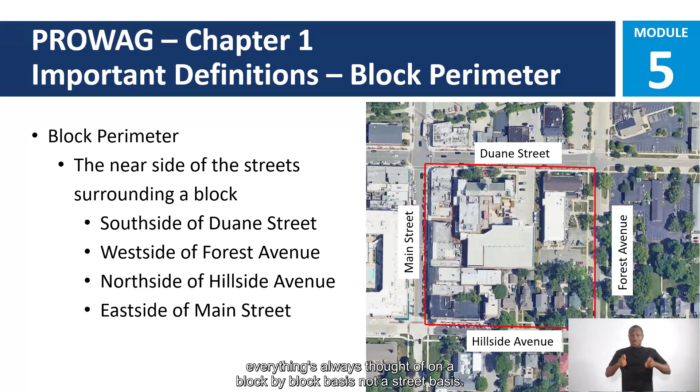Required spaces, we already talked about this a little bit, where on-street parking is provided. If anybody ever wants to have a conversation on what in the ADA requires on-street parking spaces, the answer is this: Fortyune versus the City of Lomita. So just threw that out there as sort of a, if you're ever interested in diving into the legal side of this, Fortyune versus the City of Lomita is really sort of where a lot of these accessible parking, not the technical requirements, but the obligation to provide them really sort of started with this legal case. I know sometimes people are really interested in the legal cases and how we got here. Other times they're not. This is kind of an interesting one because it did go all the way through the system and is sort of the precedent that is used a lot of times for parking conversations.

Parking wise, if you're ever doing on-street parking, PROWAG does have its own accessible parking table. Very similar to the 2010 ADA standards, not exactly the same. So if you're ever doing on-street parking, make sure that you're looking at the parking table that is provided within the PROWAG. 1 to 25 spaces, 1 spot, 26 to 50, 2 spots. I'm not really sure how you get to 201 parking spaces on a block, but if you do, at that point, it becomes 4% of the total.

The important thing to remember with on-street parking is you have to provide that connection back to the sidewalk. That's really what we're trying to do with on-street parking. A lot of this is about placement of those on-street parking spaces. Are they placed in such a way that we are providing that accessible route to get to our sidewalk? So for parallel parking spaces, the curb ramp can be provided at either end of the parking space. There's a slide about this later on, but if that's the parking spot that's closest to the curb ramp, your intersection curb ramp can serve as your curb ramp for the parking space.

So accessible parking spaces doesn't automatically mean that you need to provide more curb ramps within your block. If based on where you place them, you can utilize the curb ramps that already exist for the crosswalks as the arrival point for the parking spaces as well. For perpendicular or angled parking, the curb ramp provided connects the access aisle to the pedestrian access route. So if you are going to provide a curb ramp within your perpendicular or angled parking, that goes in the access aisle for the parking spots.

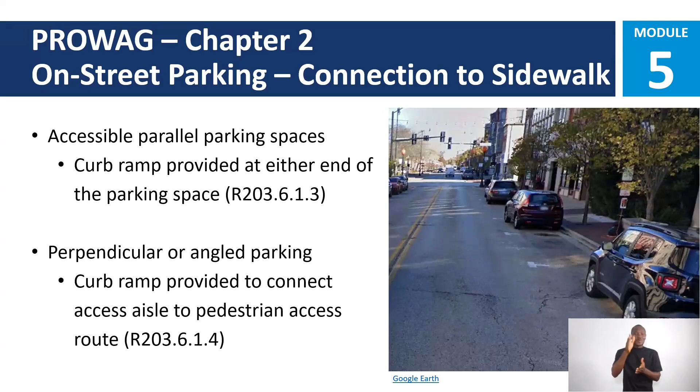Parallel parking spaces. So these numbers are going to seem shocking. This is all about the exemption. So don't be stunned by the numbers. The way that PROWAG reads is that parallel parking spaces shall be 24-foot long, 13-foot wide, which sounds outrageous, right? So this is where we go to the exemption. Where parallel parking spaces are altered, but the adjacent sidewalk is not, the spaces can match the dimensions of the adjacent spaces, if provided nearest the crosswalk and a curb ramp is provided. So if all your other spaces are 8 foot wide, that space can be 8 foot wide.

Also, in alterations, where providing the dimensions shown above would result in an available right-of-way less than or equal to 9 feet measured from the curb line to the right-of-way line, you could also go back to matching the existing spaces. So from a math perspective, the way to think about this is if you have less than a 14-foot wide sidewalk, you can provide the 8-foot wide parking space. If you have, say, a 20-foot wide sidewalk, they want you to provide that 5-foot cut in for the accessible parking space. So unless you have a super wide sidewalk, you're basically going to use these exemptions to not have to provide the 13-foot wide parking spot.

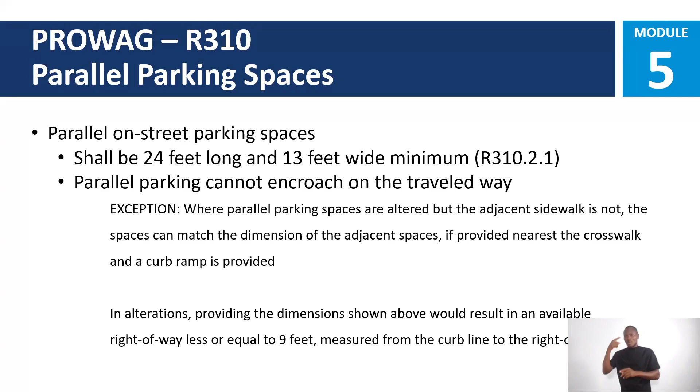So picture here, for those of you in the back, this is what I would call a standard downtown area, marked parallel parking on both sides of the street. Without getting into the questions of complete reconstruction or key locations, does anybody have any opinions on where they would start looking at placing these accessible parking spots? Near the intersections. That's my advice to you for the easiest way to do this. Always start near the intersections. If it works, it's the best possible place to put them.

So in this case, we got 2 spots on the top, 2 spots on the bottom. I am not saying that you have to make both those spots accessible parking. To me, those are the 2 spots to start. I would also add, if you're flat on one side and it's like a 9% road grade on the other side, be thoughtful as to where you put those spaces. Place them in the flattest possible location. Again, think about the usability, think about the end user, and think about how this is going to be used.

So parallel parking spaces, at the end of the day, they're fairly straightforward. If you got less than 14-foot wide sidewalk, they can be that 8-foot wide. They can go at the ends. You can use the curb ramps. The 50%, even though you're using the curb ramp as your access point, that 50% clear center requirement still exists for this, because that's serving 2 completely different groups of people.

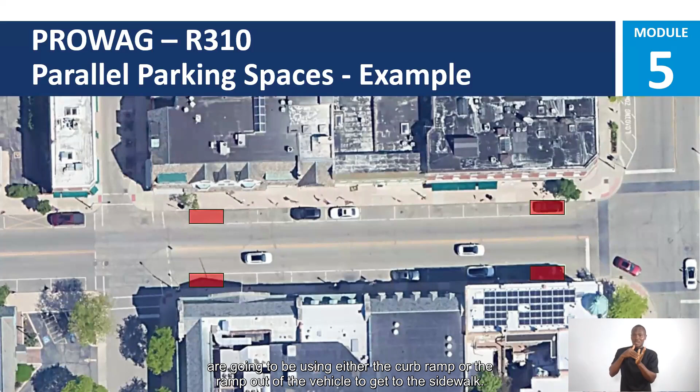The curb ramp is about someone who drives and uses a mobility device to get up to the sidewalk. The 50% sidewalk clear zone is about the person who exits their mobility device on the passenger side. So providing one does not exempt you from providing the other, because those are 2 very distinct users who are going to be using either the curb ramp or the ramp out of the vehicle to get to the sidewalk. So we already talked about the 50%. Parking space shall be identified by signage. If you have an accessible parking space, you have to sign it as an accessible parking space.

Also, if you just read R310, it says that the sign has to be mounted 60-inch minimum above the ground surface. If you have sidewalk directly behind the back of curb, that number goes up because basically it has to get over that 80 inches for hitting your head on it. So even though it says 60-inch minimum here, the PROWAG is full of situations in which 60-inch minimum applies to the parking spot, but there might be other standards within here that require you to change that more.

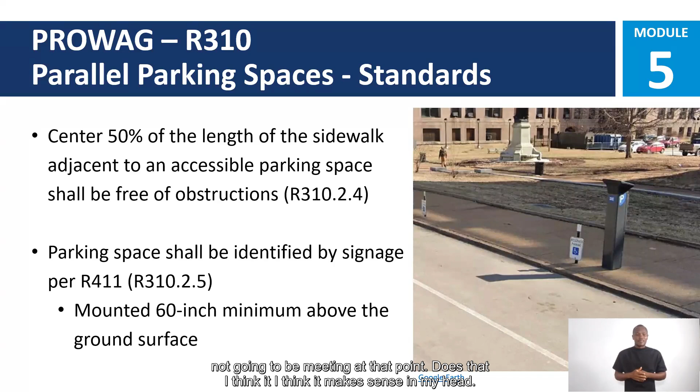We'll have a deeper conversation about this whenever we get into signage, but just a friendly reminder, a lot of times whenever you read these, if you just stop at R310 and you put that sign in at 60 inches within the existing sidewalk, there's another part of the guidelines that you're not going to be meeting at that point. I think it makes sense in my head. I don't guarantee it makes sense in anybody else's head.

Angled parking. The width of the angled parking shall be 132 inches with a 60-inch access aisle in this case. So the perpendicular parking was the 8-foot parking spot, 8-foot access aisle right next to it. For angled parking, they want the 13-foot parking spot. Is my math right on that? No, 11-foot? 11-foot parking spot with the 5-foot access aisle next to it. So angled parking and perpendicular accessible parking do not have the same width requirements as each other.

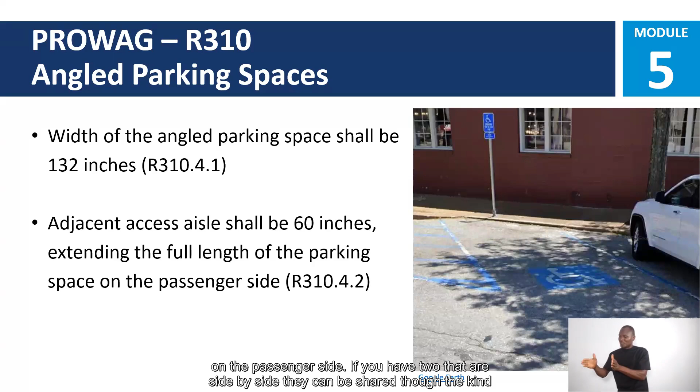So again, access aisles are still on that passenger side. So angled perpendicular parking, access aisle always goes on the passenger side. If you have two that are side by side, they can be shared. If you have two that are side by side, though, it is fair to ask that question of, are you providing coverage throughout the block if you need two accessible parking spaces? Is it best to put them right by each other, or are you better off to space them out across the entirety of the block?

But if for your design, the best answer is to have two accessible spaces right by each other, they can still share that access aisle. This is specifically for those examples of typically on-street parking tends to be one accessible space, and then the other accessible space is located somewhere else on the block.

So passenger loading zone. Oh. Let me read. I believe there's a specific exception about it. Let me read up on that, because I feel like there's something. Write that down, Nick. I'll figure out exactly where it's at. I'm almost positive there's something in there. Let me do a bit of homework. For better or for worse, my general ADA answer is give me a minute.

I will also throw out, if you don't know the answer to a question, you are never wrong to say, give me a minute. If anybody ever asks you an accessibility question, whether it's out in the field, in the office, a council person, it's never wrong to say, I need to look that up. Because my second answer is always, well, here's the 11 different circumstances that can control what's accessible and what's not accessible. So I say it a lot. I encourage you guys to say it a lot. Take that time to look into all the options so you can provide one good, clear answer at the end.

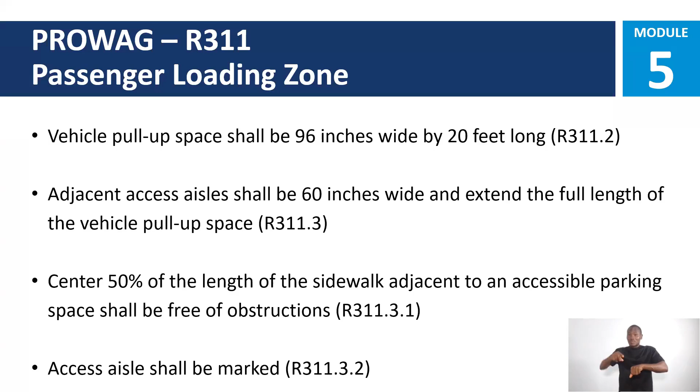So next up, we are going to jump back to R304 and dive into the always exciting world of curb ramps. Getting into curb ramps now. And so we're going to start off with some definitions of what is a curb ramp. So a curb ramp, in a general sense, is a ramp that will take you from the street or crosswalk to a pedestrian access route. So to break it down further, it's a sloped connection that's cut through or built into a curb, up to a curb. Curb ramp being perpendicular or parallel to the street or curb that it serves, or combination thereof.

So again, it's to take you from the street to your pedestrian access route, your accessible route that's in your pedestrian right of way. Then a crosswalk, that's the street part of your curb ramp, which is they both tie together, are part of a roadway that is located at the intersection or connections of pedestrian circulation paths. So a crosswalk is going to take you from pedestrian circulation path to pedestrian circulation path. That pedestrian circulation path has the curb ramp in it that connects you to the pedestrian access route, giving a lot of terms and a lot of definitions all combined within each other. But again, it's crosswalk to ramp to landing to pedestrian access route. Those all flow in together into one.

Where we get confused is a curb ramp is not a ramp. So what is a ramp? A ramp is a change of grade within your pedestrian access route, pedestrian circulation path, that is greater than 5%. It doesn't have to be part of the circulation path that follows the road grade, but any deviation of greater than 5% that is needed to get access to the pedestrian access route is now considered a ramp. Confused you yet? It confused me too.

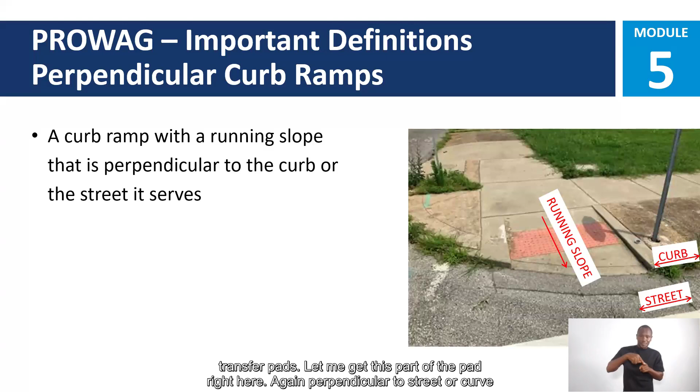That's how you define what a perpendicular ramp would be, as compared to a parallel ramp, where it comes down onto a landing and it follows your curb or street line. You'll see this around large radius returns for streets that come into an island, for large highway crossings or anything like that. So the curb ramp with a running slope that's parallel to the curb or the street. You see that it comes down, there's two running slopes that you're gonna have involved with a parallel ramp, with a landing in the center of those that match up to the road grade.

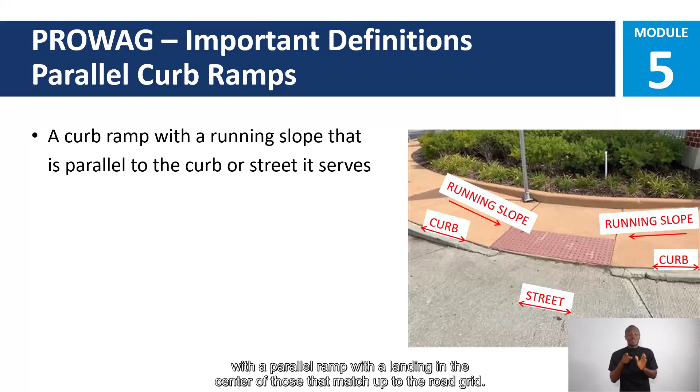That's a way for anyone with a visual impairment to determine where they are going, and when they feel the roller or cane go over the top of that area, it's easy for them to determine if they're running over paint and then they hit just raw asphalt or concrete. They can feel that difference, so it gives them sort of a boundary of where they're supposed to go. So when you go back and you redo curb ramps in general, you need to know that you're going to come back and redo pavement markings as well as the crosswalk itself to get from curb ramp to curb ramp.

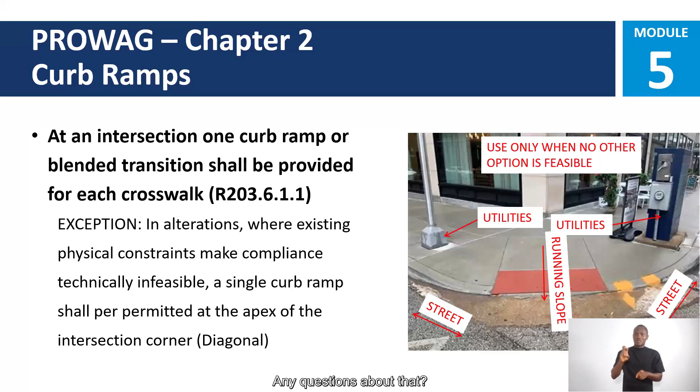But when a pedestrian crossing is prohibited, a curb ramp or blended transition shall not be provided on the roadway. With that exception though, what they do require is a landscape or non-paved surface, 24 inches minimum, or a detectable edge treatment at the bottom of 15 inches. So what this is stating is that you're going to have a hard curb, and you're also going to have these barriers at a minimum of 24 inches.

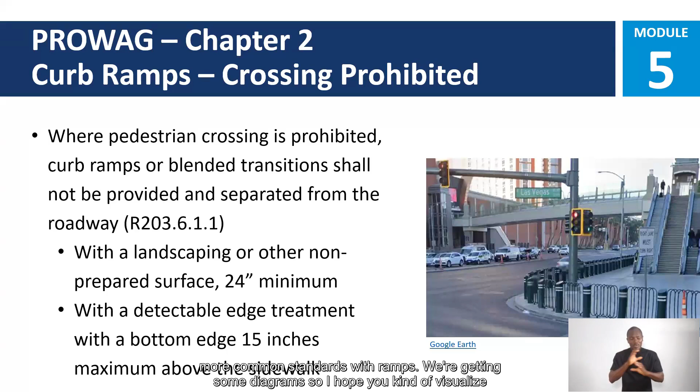Okay, so we're going on to more common standards with ramps. We've got some diagrams to help you visualize what we mean by this. So when we talk about ramps, there's clear width, or the utilized space within the curb ramp. The clear width within curb ramp runs, excluding any of the flares outside the walking area, is to be a minimum of 48 inches. Notice that is the same minimum as your sidewalks. If your sidewalk is going to be 5 foot or 6 foot, your clear width for your ramp, the usable space in that ramp, is going to be the 5 foot or the 6 foot you've designated your walking space to be.

So curb ramps shall be entirely within the crosswalk, as I mentioned earlier. So when you go back and redo a curb ramp and you add 2 perpendicular ramps where an existing parallel was, you're going to need to redo the crosswalk itself as well. That's something to keep in mind for any project for your cost estimates, that the pavement markings are included as well. But again, if you have 5 foot sidewalk, you have a 5 foot wide ramp. You have a 6 foot wide sidewalk, you have a 6 foot wide ramp. If you go to the minimum of 4 foot, that'll get you through clear space. Any questions on that?

Okay. Going on, further definitions. This is going to be repeated; I have some visuals afterwards, but for the majority of ramps, these are all going to stay standard. Run slope at a maximum is 1 to 12, or 8.3%. That is what you're utilizing to go down your ramp to the grade of the road from your pedestrian access route. You don't run sideways, you run forward, that's your run slope. It's an easy way to remember it. Your cross slope is always going to be 1 to 48, 2.1% as your maximum. As a design suggestion, it's easy to design to 1.5.

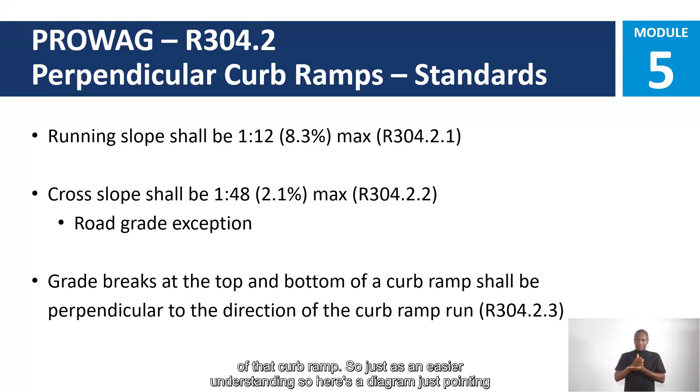Grade breaks are at the tops and the bottoms of curb ramps, and they shall be perpendicular to the direction of that curb ramp. So just for an easier understanding, here's a diagram. This is pointing out our grade breaks at the top and the bottom of a perpendicular curb ramp. You see our road grade is coming down left to right, so our cross slope is going to follow as such at a 2.1 max.

And again, if you need to jot these down or draw these again, these will all be online again, so you don't need to be artistic. But the running slope is at a maximum of 8.3. So again, going from your grade break from the top of the ramp to the bottom of the ramp, you have a maximum 8.3, maximum cross slope 2.1.

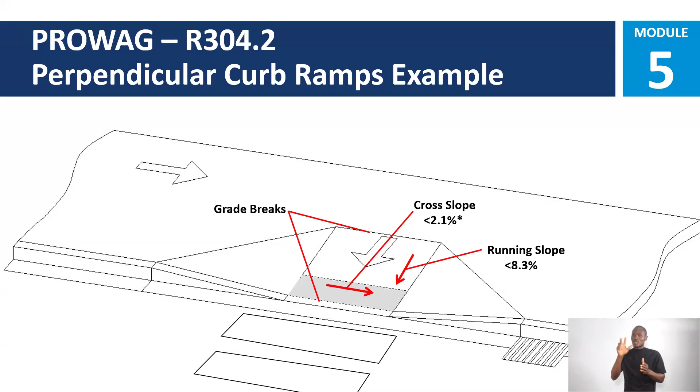Your clear width areas, again, this is going to be your landing area that we were talking about earlier, 48 by 48 inches or 4 foot by 4 foot at a minimum. It should be provided at the bottom of the grade break and the top of the grade break next to the crosswalk. This is a lot different than what we have with a parallel ramp because you're going to have 2 clear space areas.

So those all have an extent of clear width area of maximum 5% when you match the road grades. So when you come down onto the street grade, you have a maximum of 5% to deal with. So you're gonna have to do some redesign of that shelf of the road. But when you do any kind of change of grade on your road slope, this is what can activate you changing a ramp slope as well.

So for a better visual, you can see the top where we had grade breaks. Now we have a 48 by 48 minimum landing at the top, and we have a 48 by 48 clear space at the bottom as well, next to the crosswalk. And I think beforehand, I forgot to mention flare slopes. Flare slopes are a maximum of 10%.

When you measure your flare slope though, don't go and put your 2 foot level onto the curb. The curb is not what you're measuring for the flare. This is where you can get in trouble: if you're floating concrete and you shove a little too hard, that flare can start getting punched up and then you're flying into 15%. This is why it's hard for some individuals when you're out there

So, it depends on, number one, the scope of work and what you're doing. And number two, if this is at a stop controlled intersection, then the requirement is a 2% cross slope. If it's at a yield controlled intersection, then that's where we get up to the 5%. And it's really sort of what you're doing with the road. If it's a roadway reconstruction project and you have a stop sign there, then you need to reconstruct that back at 2%.

If, say, you're just putting in new sidewalk as part of a sidewalk project, then most likely your scope of work is not going to take you out into the road. But if you ever touch the road, then you'll need to bring that up to code, to meet the guidelines at that point. So it's kind of based on what else is going on with the project. Actually, we were working on a project where we were just doing sidewalk.

And there was no way to get it into compliance because the road grade was, I think, 5.5%. So there's no way to match going into the road where it stops. So in that case, I would say you're going back at the road. Well, if you ever reconstruct the roadway, at that point, what worked for this project probably isn't going to work for the next time you do this.

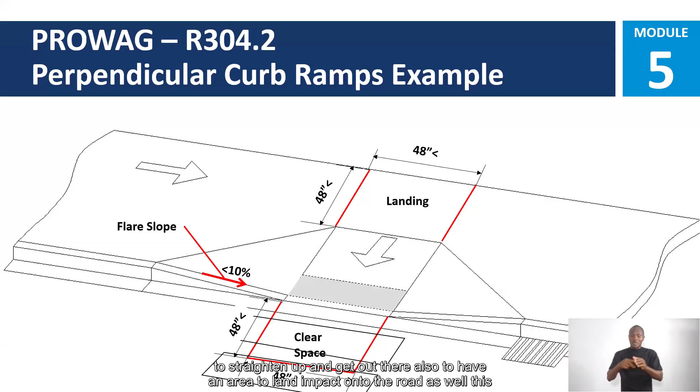Also, just to give an example of this clear space, because I'm going into parallels and you'll see there's not going to be a need for the clear space area. When you're entering the street or coming from the street onto your ramp, you need an area to square up and prepare yourself, as someone in the chair, to go up that ramp. That's the idea behind a clear space: an area to straighten up, and also to land onto the road. This will be different for a parallel. So to reiterate, parallel ramps have the same running slope, 8.3% maximum, 1 to 12, cross slope 1 to 48, 2.1%, except for the road grade exception we discussed earlier.

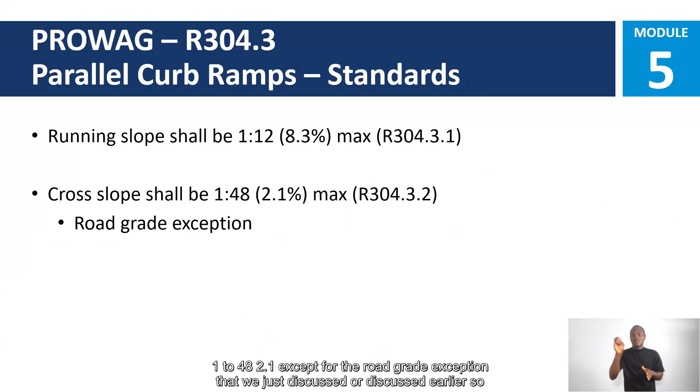So we're going into parallel ramps. You can see we have 2 running slopes that match down into a cross slope area that falls to road grade. That is our landing area, which is why you don't need 2 separate clear spaces for a parallel ramp. Parallel ramps come from large radius returns with one adjacent sidewalk coming through. You can drop down to road grade and follow a matched road grade, so you don't need an area to prepare yourself because you're in the safety of the sidewalk or pedestrian access route to access either running slope. The grade breaks again are the top and bottom of the curb ramps, and they should be perpendicular to the direction of the curb ramp.

This is your landing area with your grade breaks. This is what we're talking about. You have running slopes coming down to that landing area. So there's no clear width area outside in that road. For anyone in the back, they can see all these grades.

And this is going to be a minimum of 48 inches or 4 foot by 4 foot. Again, this still stands true if you have a 5 foot sidewalk. It's going to be 5 foot by 5 foot; 6 foot sidewalk, 6 foot by 6 foot. That's going to give yourself that landing area on a parallel ramp.

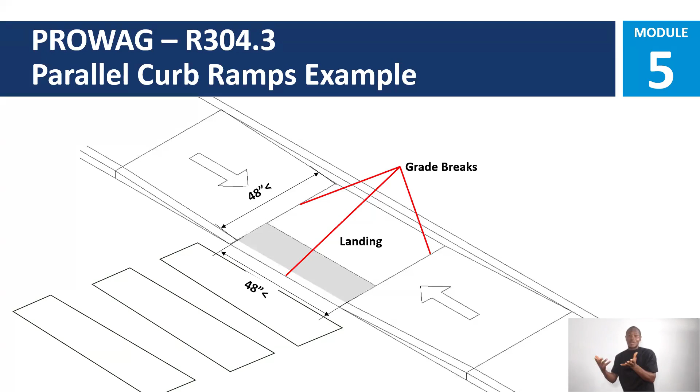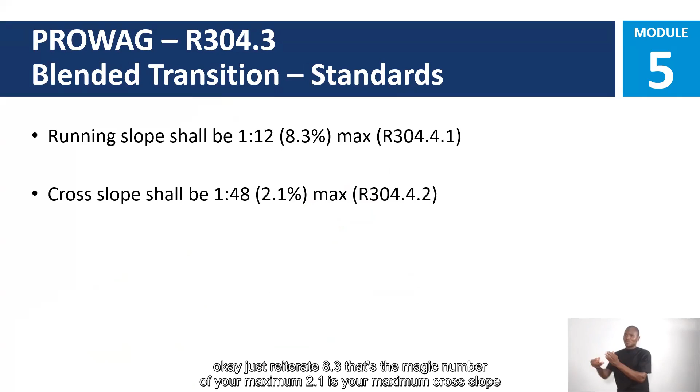So you're gonna have a maximum run slope on either side of 8.3. Again, don't try to build to the absolute maximum. That's where you're gonna get yourself in trouble. Don't design to the absolute minimum, same way. You have a cross slope of 2.1 falling off onto road grade for visuals.

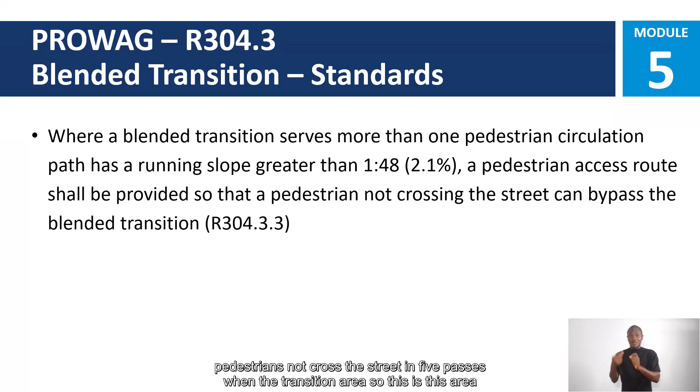So where a blended transition serves more than one pedestrian circulation path, so you have 2 sets of sidewalks adjoining at the same time, and the run slope is greater than 1 to 48 or 2.1, a pedestrian access route shall be provided so that pedestrians not crossing the street can bypass this blended transition area. So this is this area that we're talking about in the landing. This landing area is a clear width area. So having the minimum 4 foot area inside that landing needs to be an area.

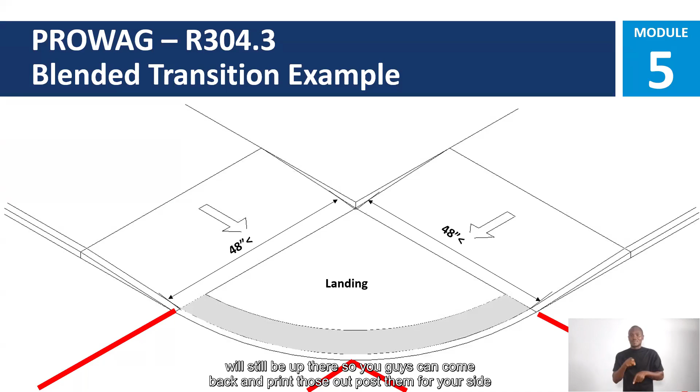So everyone following with that? Okay, and again, these diagrams will all be downloadable, and all those numbers will still be up there. So you guys can come back and print those out, post them for your side, whatever is going to help for you.

Now we're going to get into the fun talks of detectable warning surfaces. Travis. So, yeah.

I think a couple of housekeeping items on the question related to the crosswalks. R302.5.2.3 is what specifically talks about crosswalks with traffic control signal. And that sets that at that 5% maximum slope. So yeah, that 5% maximum slope is established there.

Detectable warning panels. Detectable warning surfaces have been controversial in the disability community since they were first thought up. They are loved by the blind community. They are despised by the wheelchair community. And if you ever go to a disability ADA symposium, something like that, if you hear an argument between two different disability groups, there's a chance it's over detectable warning surfaces.

They have changed a lot throughout the years, but this has sort of been the standard for the last 20, 25 years, as the compromise that was sort of established through these various communities. And really what a detectable warning surface is, it is a standardized surface feature built in or applied to pedestrian circulation paths or other pedestrian facilities to warn of hazards.

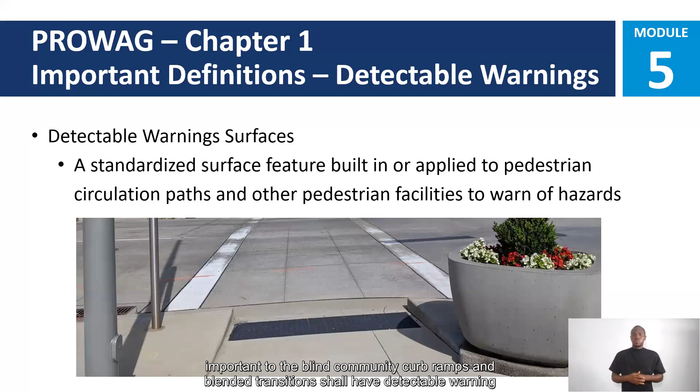So there are places they have to go. There are clear requirements where they go, but don't just put them everywhere. Give some thought as to where they go, or else they're really going to stop their usefulness to the blind community. And these are really, really important to the blind community. Curb ramps and blended transitions shall have detectable warning surfaces. Sort of clear cut. I think we're all generally familiar with this requirement. Exception, detectable warning surfaces are not required on curb ramps used exclusively to connect parking spaces and loading zones, the comment from before.

So then the big question becomes, what happens at driveways? And as we already talked about, pedestrian circulation paths at driveways controlled by yield or stop control devices or traffic signals, that's been taken from should to shall have detectable warning surfaces. For other entrances, engineering judgment is always allowed if you deem that there is value in having it there. But the shall applies to yield, stop controlled, signalized commercial entrances.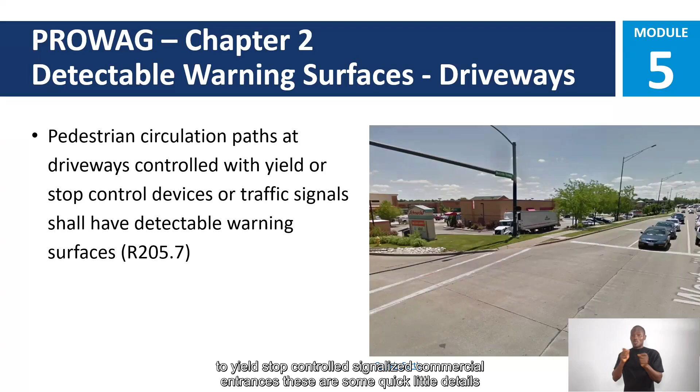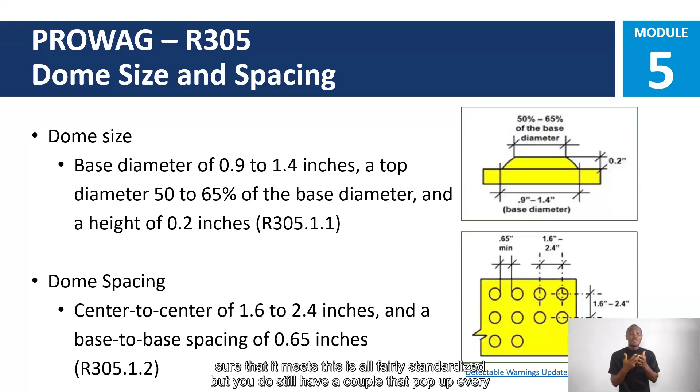These are some quick little details on what they have to look like. For the most part, the detectable warning panel manufacturers have gotten very good at meeting these requirements. I bring these up solely to state if you as a community want to say, these are the only detectable warning surfaces that are allowed in my community, take the minute to make sure that they meet the requirements. Because by you stating that these are the ones that are allowed in our community, you've now taken the responsibility off somebody else and put it onto yourself. So take the couple minutes, look through the requirements, make sure that it meets. This is all fairly standardized, but you do still have a couple that pop up every once in a while that aren't within these parameters.

This comes up as well. Contrast, the way that the guidelines read is that the detectable warning panels have to provide contrast with adjacent walking surfaces, either light on dark or dark on light. They don't provide, or none that I've ever seen has provided, a scientific definition of what the word contrast is. I've never seen a clear, it's got to be X amount of whatever for it to contrast. So this is in a historic district, and they have brick sidewalks, and they put in detectable warning panels that look very similar to the brick sidewalks. So in this case, I would argue that there's no contrast there.

However, when this argument happened, the response was, okay, tell me what we need. And that's sort of where we ran a little bit short, is knowing what the clear definition of contrast is. But just know that there's a reason detectable warning surfaces are bright yellow, bright red. The goal is for them to be very, very visual. Because we're not just talking about the blind community here, we're also talking about the low vision community. So with the low vision community, yes, there is the ability to see, but we want these to stand out. I understand there might be a desire to have them blend in with the sidewalk because it is more pleasing to an architect or landscape architect or whoever. But the goal here is for these to stand out, for these to matter.

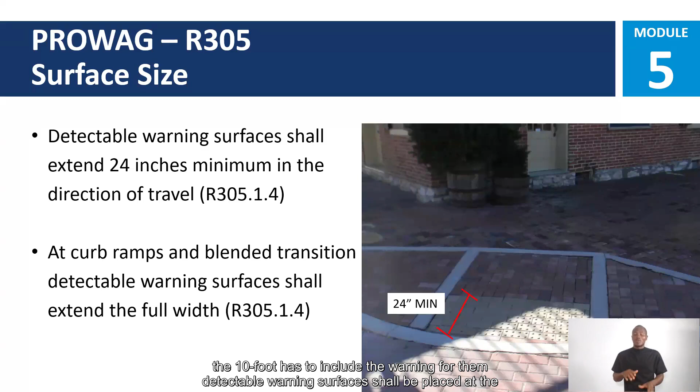Detectable warning surfaces shall be placed at the back edge of curb or no greater than 6 inches from the edge of pavement. So you can't set them 2 foot off the back of curb because, for whatever reason, that feels better. The goal is to have them right on that curb line, because really what we're trying to do is shorten the distance that they have to travel between detectable warning surface and detectable warning surface.

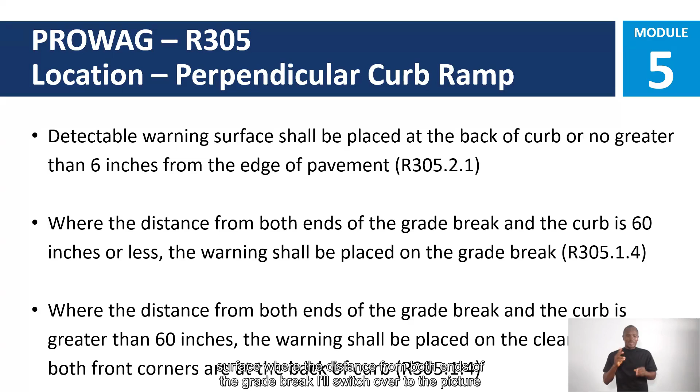Where the distance from both ends of the grade break, I'll just switch over to the picture. Where the distance from both ends of the grade break is less than 5 foot, it's put perpendicular to the curb ramp. Where it's greater than 5 foot, that's whenever we wrap along the curb line. So 5 foot's kind of the magic number there.

Of less than 5 foot, you're going to have a little bit of concrete on the far side between the detectable warning surface and the curb line. Once you get greater than 5 foot, that's whenever we're wrapping it along the curb line. That is consistent with IDOT standards as well. So 5 foot's sort of your magic number there. Any questions? Oh, yes.

I consider it a landing because IDOT considers it a landing. I have had many discussions with the US Access Board, and their feelings are a little bit different than IDOT's are on that. But for the most part, most of what I'm involved in is work where we have to meet IDOT standards, and the IDOT standards do consider that a landing. If you're working on a purely local project, PROWAG does not have those strong feelings about that being a landing.

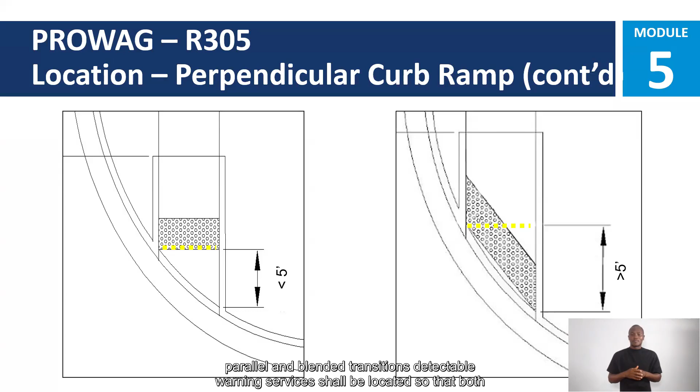I think what they should have done instead of doing those curbs was to make those running slopes and just lower that whole sidewalk down to the landing and basically slope the entirety of it. And if that didn't work, they could have done flares off the actual ramp side of it and then held the pedestrian access route on the back. So when you're in those situations where people might be walking, flares are always better than curbs. Because yes, you go down a slope and you might catch yourself, but you're not going to trip over that curb. That curb with that sharp face is where people have accidents. We'll go here first.

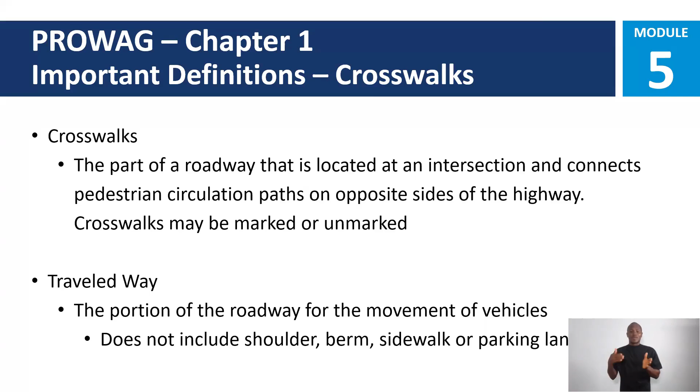That is faster than you think it is. But this is sort of like everything in life. This is the compromise between we've got to get vehicular traffic through and we've got to get pedestrians through. So 3.5 feet per second is what that is based on.

Another thing that I'll throw out here is that that clearance time is measured from push button to push button. So as you're working with your consultants, or if this is something that you guys do in-house, the timing is not based on whenever they hit through lane number 1 to whenever they leave through lane number 2. Because realistically, they're going to be set up at the push button when they start. So it's taking into account where they start from, and then once they reach the next push button, that's theoretically the landing or the safe place that they're going to. So this timing goes from push button to push button.

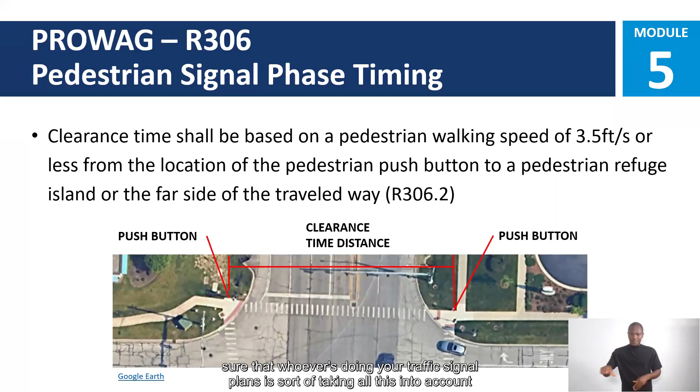So we'll get into APS in a second. Wanted to switch back over to roundabouts for a second, because we talked about earlier, a lot of changes to PROWAG as roundabouts become more and more common throughout the United States. PROWAG is sort of catching up to what those requirements need to be. So for anybody who might not know, a roundabout is a circular intersection with yield control at entry, which permits a vehicle on a circular roadway to proceed counterclockwise around a central island.

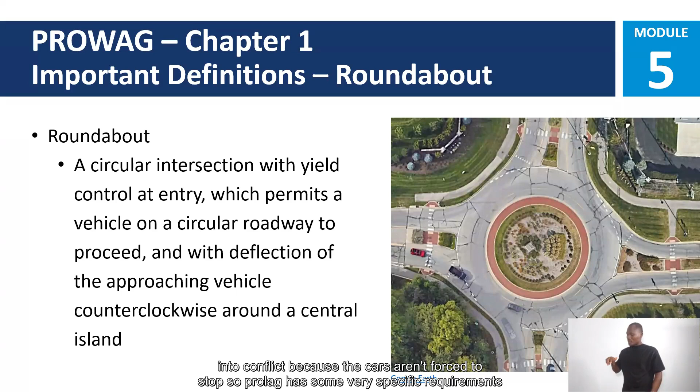So the big change here for pedestrians is that there are no stop signs, there are no signals. Everything that makes a roundabout good for a car is what can potentially bring pedestrians into conflict, because the cars aren't forced to stop. So PROWAG has some very specific requirements when it comes to roundabouts.

So where pedestrian crossing is not intended. For roundabouts, if you don't want them to cross into the roundabout at that location, we're back to that 24-inch minimum landscape area, or the detectable edge treatment, 15-inch maximum above the sidewalk. So most likely not a fence, could be a curb. I will say the best solution for this, if you have the space and you have the maintenance ability to maintain it, is that 24-inch clear zone between the sidewalk and the curb line. If that's not an option, then that's whenever you get into option one and you start looking at your alternative options.

And really the reason this is here is if you imagine that you're someone who's blind, at these roundabouts, you're kind of doing some odd movements. You're kind of going, and there's an expectation that there's going to be a crosswalk there. So you're trying to make it clear to the user that this is not a safe place for you to cross.

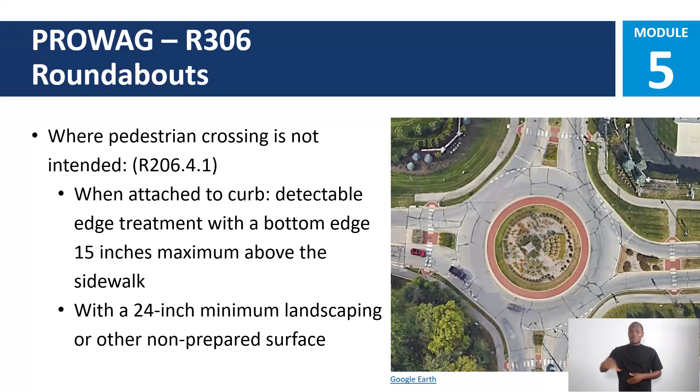Already hit on this as well, but listed here again, just because it's important for those multi-lane segments: traffic signals, hybrid beacons, raised crosswalks, things of that nature. If you're getting into the world of multi-lane roundabouts, just something to be aware of. Also worth noting here that it is the segment of the roundabout. It also includes any multi-lane channelized turn lanes that come out of that roundabout. So if your roundabout has a slip lane that allows someone to make a free flow movement outside of the roundabout, and that's multi-lane, that also falls under this as well.

So we already covered most of this this morning, but again, the big thing here is just to be aware of it and to ask those questions, and hopefully this triggers something in your mind when that next roundabout project does come up.

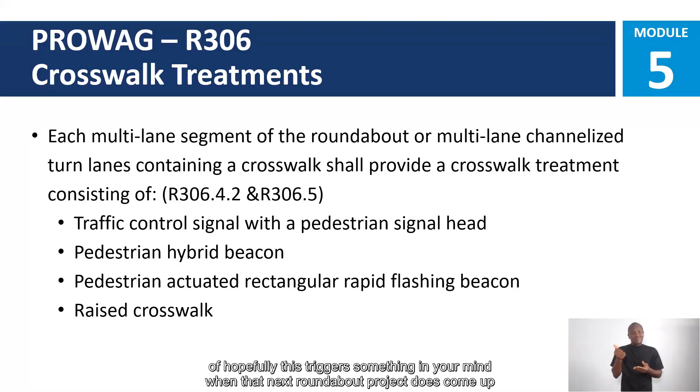So pedestrian traffic signals. A push button: that's the button to activate a device or signal timings for pedestrians, bicyclists, whoever. The push button locator tone: that's the little buzz, the little beep that you hear that guides someone to where that push button is located. So that is not the walk now sound that we're talking about. I describe it like a chirp. It's almost a little chirp that allows someone who's low vision or blind to know how to get to that push button. It has nothing to do with crossing, everything to do with finding the push button.

Vibrotactile, you will see the word vibrotactile throughout these PROWAG standards. That is a method of communicating information by touch using a vibrating surface. If you've ever seen this on a pedestrian push button, that's whenever you push the button to activate it and it kind of shakes a little bit. That's what vibrotactile is. It is an alternative form of letting someone know that the button is pressed.

In this case, particularly the deaf community, you might say, yeah, but whenever I press my push button, there's a chirp sound that tells me that I've activated it. How does that work if you're deaf? If you're deaf, you have the vibrotactile option. Really what these APS signals are about is multi-method communication. We communicate one way, but we have another way of communicating as well.

Traffic control signals. Again, I will note, this is for new traffic control signals, reconstructed traffic control signals, altered traffic control signals. As we talked about earlier this morning, swapping out a signal head doesn't automatically mean that you have to do this now. But if you are putting in new, if you are reconstructing, if your review agency requires you to put these in for whatever reason, that's when all this APS stuff comes into play.

So where pedestrian signal heads are provided, the walk indication shall comply with R308. So R308 basically states what that walk indication looks like. Big thing here, several communities have tried to get creative with their walk indicators. Maybe you're in a music section and they want like a guy playing guitar to be the walk. It sounds silly, it's happened, there's a reason they put these regulations in. This is straightforward. They want the walk guy, they want the hand. So if you ever get in a conversation of, oh, we can make this signal head really cool, that's not the expectation.

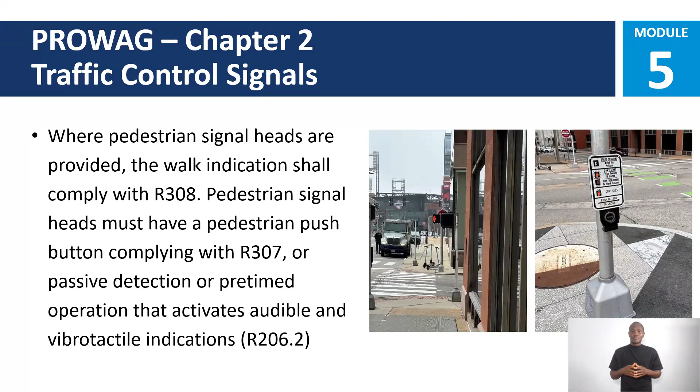Pedestrian signal heads must have a pedestrian push button or passive detection or pre-timed operation. So passive detection or pre-timed is still acceptable, but it has to have audible and vibrotactile indications. So what you see now for a lot of passive is they'll mount on top of the mast arm a chirping device that'll communicate to you the same way that the pedestrian push button does for APS. So passive is not banned through accessible pedestrian signals, but just know that if you do have passive pedestrian detection, those requirements for alternative cues pass through for passive as well.

Activation wise, pedestrian push button and passive detection, whichever one it is, it has to activate the accessible pedestrian signals and, where applicable, the walk interval. This sounds silly, but how many of you have pedestrian push buttons that don't actually do anything today? If we're honest with ourselves, we all probably have one somewhere. Whether it's yours or whether it's IDOT in your community, there's probably one there that doesn't work. So if you have a pedestrian push button, make sure it does something.

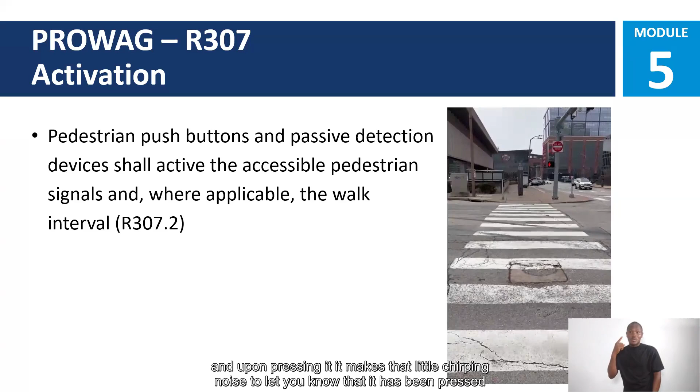So you're not gonna be able to hear the audio here, but the way this works is you press it, and upon pressing it, it makes that little chirping noise to let you know that it has been pressed. So whenever you put in new pedestrian push buttons, they have to include that locator tone, that sound that guides you to them. Very specific requirements on the tone. I don't expect you to know these, just know that they exist. So 0.15 seconds or less, 5 decibels above the ambient sound, that's all out there. So just as you get into this, know that there are very, very specific requirements on what they're looking for from these. I will also note that these are adjustable.

So if you get a new APS signal in and it's loud and you can hear it from 200 feet away, you can turn that down. That's doable. If you get a new one in and you can't hear it from 2 feet away, you can turn it up. You are not committed to whatever sound it comes out of the box at. They are, yes, ma'am.

Let me make sure I'm answering. Yeah, so to me, what that means is you're gonna have to make field adjustments for what's going on in the actual thing. So they don't tell you that it has to be X specific decibels because it might not be appropriate based on the site.

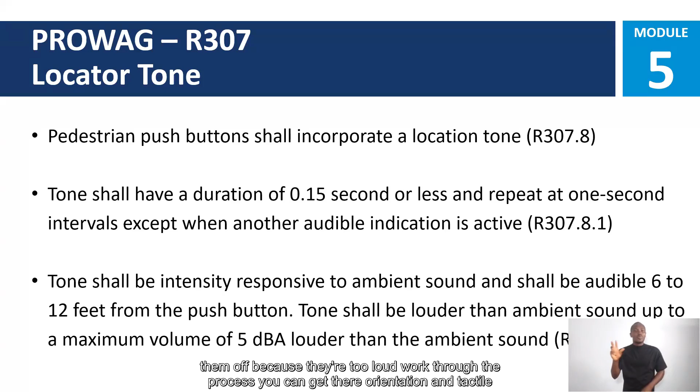Orientation and tactile arrow. The face of the push button shall be parallel to the associated crosswalk. Most of these push buttons now have that tactile arrow that points at it. That's there for a reason, and that is directionality clues for people. So every once in a while, you'll see one of these in which it'll have the arrow and it'll just point you into the grass because that wasn't thought about during the process.

The arrow's there and the arrow serves a very specific purpose for people. So match that arrow up with the crosswalk. That's one of those things that sounds obvious, but I've seen enough of them wrong now that I feel inclined to mention it because it certainly does happen.

So it's got to be a tactile arrow, and again, high contrast. If you have a black background, silver, white. If you have a white background, black. Something that allows the low vision people to pick up on those arrows. We want this to be obvious. We want this to be very clear as to where they're pressing and what they're doing.

Push button wise, requirement wise, push button shall be located no greater than 5 foot from the side of the curb ramp run. Again, from sort of the most basic level, we want somebody to be able to push the push button and then go straight through the curb ramp. We don't want them pushing a button that's 40 feet away, then they got to wheel around, come back, line themselves up on the curb ramp, then they didn't make it, so they got to go back and do it again. So these requirements are all about functionality for the user. So no greater than 5 foot from the side of the ramp run.

Push button shall be located between 1.5 and 10 feet. The way that PROWAG reads, it prefers 6 feet. 6 feet is the desired. In my experience, getting it in with 6 feet is often a major challenge. So it does allow you to go up to 10 feet in certain situations. I do want to note that sort of the base requirement is 6 foot. You can go up a little bit more if you need to.

And again, this is that we want that crossing distance to be as short as possible. We don't want it to be 40 foot back because now instead of crossing a 24-foot road, they're realistically crossing a 64-foot road.

This is the other big headache, I'll call it, that people have when it comes to APS. The requirement that where 2 push buttons are provided on the same corner, they shall be 10 feet or more apart. We all know there are situations where that just doesn't happen. So they provide an exception. In alterations where technically infeasible to provide 10-foot separation between the push buttons, a pedestrian push button with a speech walk message complying with that standard shall be provided.

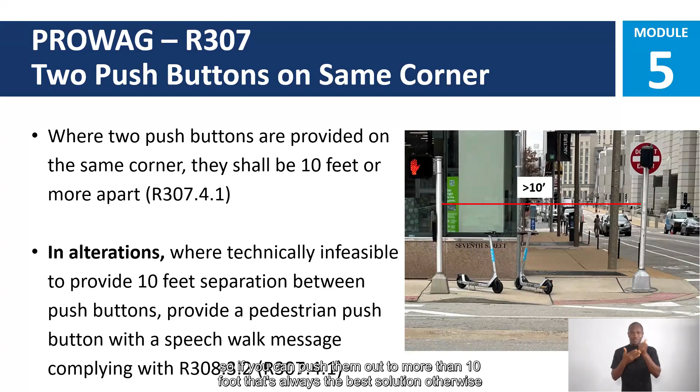So if you can push them out to more than 10 foot, that's always the best solution. Otherwise, we're now talking to each other.

APS shall have audible and vibrotactile walk indication during the walk interval only. One of the things that APS does is it provides guidance on when you can start walking, and it stops sooner than the signal does because it's trying to help with that timing. As soon as it switches over to don't cross, the audible and vibrotactile walk indication goes away because it's not safe for them to start the crossing at that point.

The audible walk indication shall be audible from the beginning of the associated crosswalk. So if you've ever seen these in action, they kind of talk you through the crosswalk. There's a cross at the beginning and there's a cross at the end. And that audible side of it kind of serves as the guide to sort of guide you through the crosswalk.

Then following the pedestrian change interval, it goes back to the locator tone. So it's not required to always be talking. It's talking whenever someone's pushed it and it needs to talk. Question?

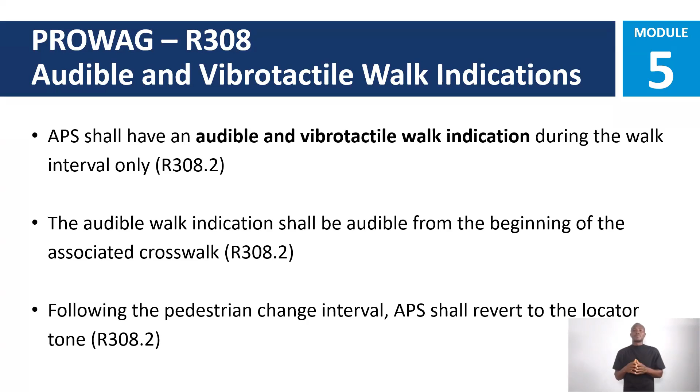So where an APS is provided at a single crossing, or two APSs are 10 feet or greater from each other at the corner, the audible indication shall be a percussive tone. So this also applies to those rapid rectangular flashing beacons as a single one. It is a percussive tone that is very quick, very high pitch. So it's 8 to 10 ticks per second. So if you imagine how quick that's going off, it's a very quick sound. And then there are specific hertz requirements for that.

If you get within 10 feet and you ever have to mess around with this, PROWAG gives you the language that you have to use. It gives you the timing, it gives you the speech, all that. So the push button shall only be actuated when the walk interval is not timing. So if the walk interval is on and you walk up and push it, you have to wait for the whole next cycle before it goes.

And in the meantime, it has to say wait, followed by the intersection identification information. So, wait to cross Broadway at Grand. So as soon as you press it, it's talking to you, it's communicating. Main reason it does that is so that somebody knows that they've done something. That is the verbal cue of you have pressed the button. It is going to happen, but it hasn't happened yet.

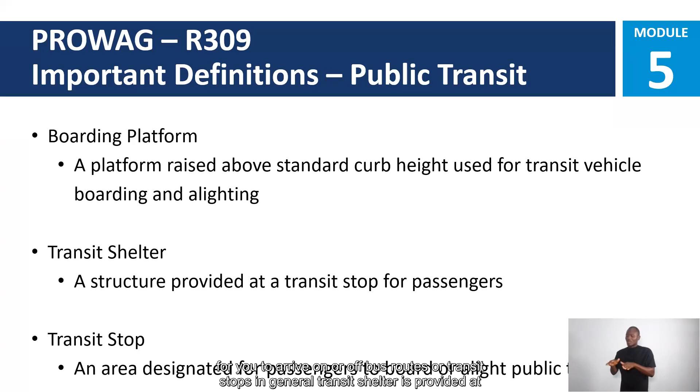Transit shelter, the structures provided at a transit stop for passengers. A transit stop is an area that's designated for that boarding platform or transit shelter to give access for passengers to board or depart from public transit. Again, they all kind of flow in together. Boarding platform is for you to get on or off the bus at transit stops in general. Transit shelter is provided at these transit stops. We'll get into more details.

So when that shelf comes out and drops down from an accessible lift ramp on a bus, it's going to come out 4 foot. So when you have that 4 foot, it goes to 8 foot so that you have a clear area outside when you roll off that platform.

That's the idea behind having an 8 foot drop out where you have this large platform. So again, a lot of these areas too, this is times when you'll see a random bus pad out in the middle of nowhere in your cities, where it's just an 8 foot by 5 foot platform that you probably think, why is that out here? This is why it's out here. So keep going.

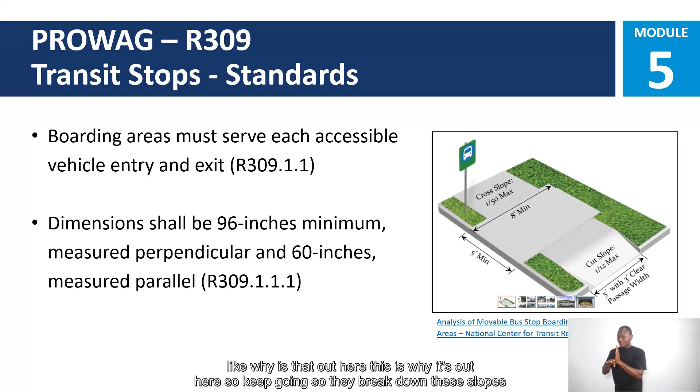So they break down these slopes and get a little confusing on how they phrase these. The slopes that parallel the street shall be the same grade as the street. So again, just to make this easier, your run slope of this bus pad is your run slope of your road, and your cross slope perpendicular shall be 2% maximum. This is your cross slope.

So if I'm facing this bus pad, I enter the bus from my left side, my cross slope is still 2% max or 2.1 maximum cross slope. My run slope for that pad is still following the street grade. That's an easier way to try to get rid of the words out of here. And again, the surface shall comply with 302.6. This is your slip resistant surface that is standard for what we had talked about for sidewalks previously.

So the reason for matching the slope of the road is if you've ever seen one of the buses operate, the way that it operates is that the loading platform comes down, but if that bus is at a 5% road grade, that platform is now at a 5% road grade. So if you build that bus stop with 2.1%, thinking, oh, it's a level landing, it's got to be 2.1%, it's not going to actually match up with the loading platform, and that creates that vertical displacement.

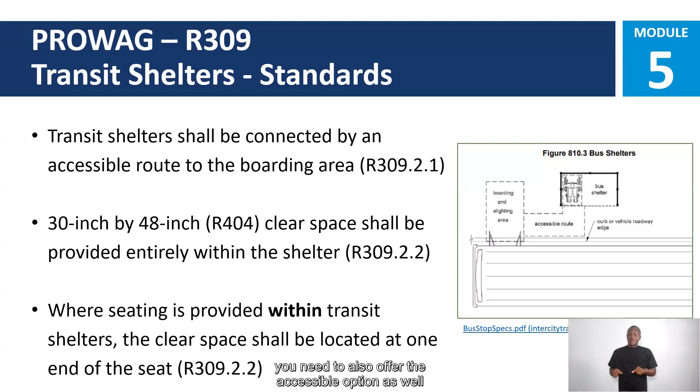We'll dive into that. But the environmental controls shall be proximity activated. You can read. Understand what I'm saying? So they will have an ability to be activated as you are inside the shelter, but there is no need for them to be automatically turned on, pushed off, or wasting electricity out there.

The slope parallel to the street shall be the same grade as the street. Again, this is reiterating that run slope, so that when you're going on to the bus pad, if the bus was at an angle, you're able to get on at that same angle. This is that cross slope and run slope we discussed earlier, along with the perpendicular, which shall be 2.1%.

So again, following the diagram on the right side, the accessible route is going to follow your cross slope and your run slope. 2.1 cross, matching your graded road slope to your bus pad, which is also going to have a 2.1 slope to your bus entrance. A lot of slopes, a lot of crosses, but if you have an accessible route through all of this, it'll flow easily through all of your metro station stops.

Are there any questions? No. Okay, I don't think we need to take another 15-minute break unless we all feel like we really need to. Feel free to get up and use the bathroom, but I feel like we all are ready to continue powering on through the rest of this. All right, a lot of shaking heads.

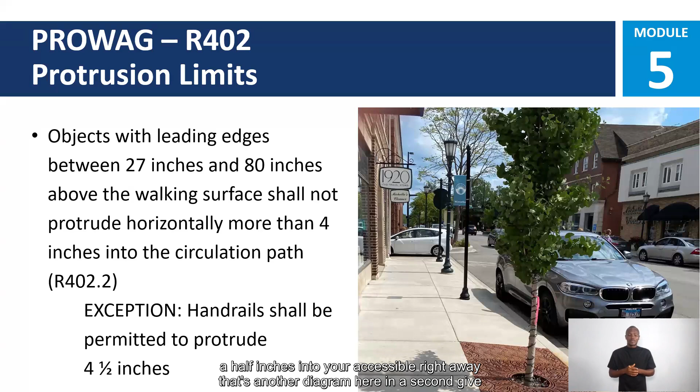Okay, that can go for anything: a sign, an existing tree, say you have some new signage, lights, anything that protrudes off a building as well. So in this photo, you have a tree, you have a sign over there for the 1920, whatever this business is. You have some banners for your city. All of these can't swing over more than 4 inches. The exception though is for handrails, which can go to 4.5 inches into your accessible right of way. There's another diagram here in a second to give a little bit clearer idea.

So objects mounted between posts: this could be anything from your seasonal banners for your downtown events. This can be large signs you hang between light poles. This could be any type of signage that you have existing permanently in your access right of way. If their posts are greater than 12 inches apart, the lowest edge should be 27 inches maximum, or 80 inches above the walking surface itself.

So again, this is that same height range. You're just trying to avoid anyone getting their head hit that isn't able to see, or having overhang into your pedestrian access route. Again, this is the same standard for trees, for signs, permanent signage that you would have out there, or temporary signage that you could have out there as well.

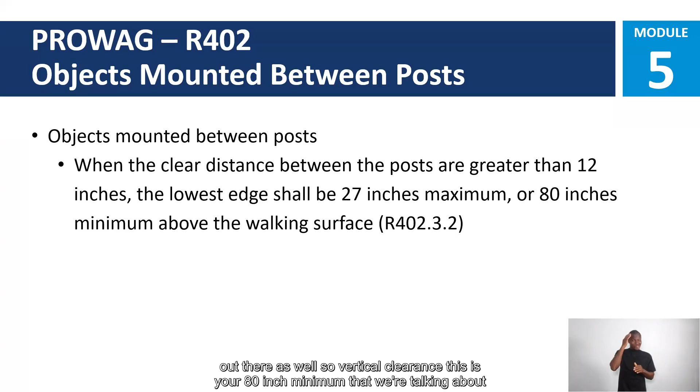So involve yourself as much as you can in these conversations, or make sure that whatever you need in your public right of way to have it be accessible is clearly expressed to those other agencies within your community. Because yes, they can put the sign in, but at the end of the day, you're the one who doesn't have the compliant public right of way anymore.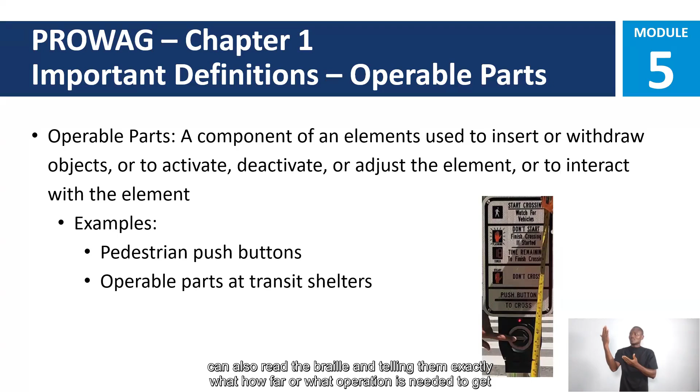It's also within its reach range as well. You can see all the signage. And what's hard to tell is there's also a little clear piece there as braille. This is part of their new sign design that they have down in St. Louis, where we took this photo. So someone that is visually impaired is also able to tell which direction the arrow is telling them to go. They can also read the braille, telling them exactly how far or what operation is needed to get that sign to work for them.

For definitions of reach range. So reach range is required for elements with operable parts. This is what we were talking about with the push buttons earlier. Specific minimum and maximum heights. So we're going from between 36 and 40 inches. The different heights are based on parallel side reach and front. So again, you're coming onto a clear space area; it needs to be within 10 inches of that area. If you're someone in a wheelchair, say you can't be leaning forward, it needs to be within just the seated area to be able to reach this operable part.

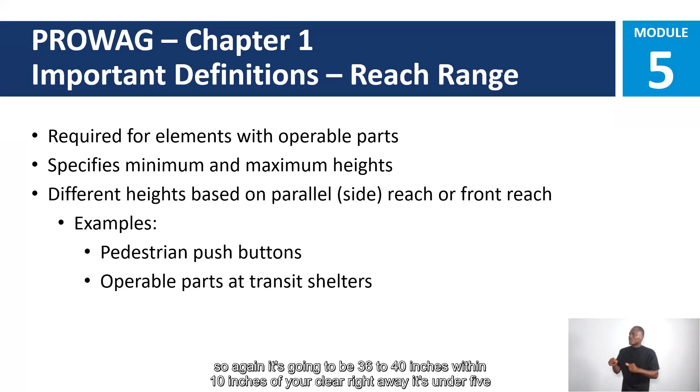So again, there's a lot of ranges that are going to come into trying to get a single piece of equipment to be accessible for an individual that's at the top of the landing to access this ramp appropriately. So again, it's going to be 36 to 40 inches within 10 inches of your clear right of way. It's under 5 pounds.

Level. So we discussed this earlier. Level is calling out 2.1 maximum cross slope and run slope on the clear width area. So a level landing is clear of obstructions at operable parts. So that means no overhang, there are no tree branches coming into it, there's no overlap of bushes, there are no signs that are underhanging. This clear area truly has no other parts outside of that operable part area being accessed.

But the exception is when there's a slope of a clear space that exceeds 2.1 in either or both directions due to the grade of the adjacent road or pedestrian access route; the slope of the clear space may be consistent with the slope of the pedestrian access route. So again, this is when your road is at like 7%, and you're going to have an operable part that's going to be needed to cross here. That's when you have that exception that you can use the pedestrian access route as your area to follow through as a clear space. That can be over 2.1%. Any questions about that?

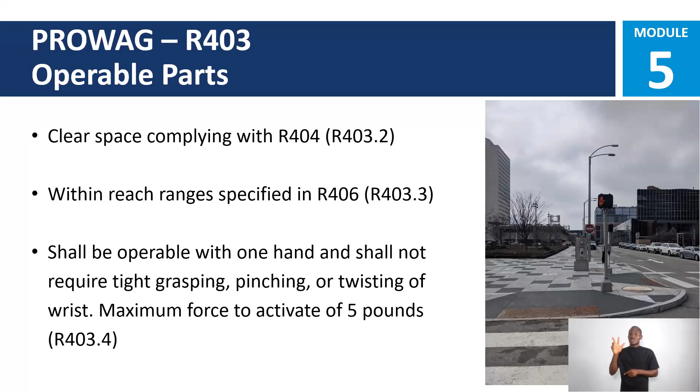The slope of the clear space is 2.1 in both directions. This is, again, the same thing as any other landing clear width. This is why having an operable part for push buttons is better off at the top of your landing. You already have an accessible pedestrian access route that's going to match into your operable part area, or push button, as an easy way to say it. And it shall be within 30 inches to 48 inches. This is the height requirement I discussed earlier. So it's going to be under 5 pounds, 30 to 48 inches, within 10 inches of your reach range in a clear space area.

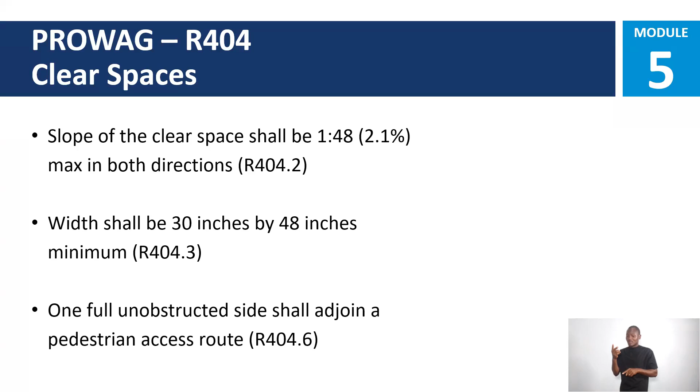Forward and parallel approaches: high reach is going to be 48 inches maximum, and a low of 15 inches. So for forward reach, again, this is for someone that's in a chair so that they don't fall out while reaching out to operate this part. It's going to be 48 to 15 inches of reach range inside here.

For the forward reach, obstructions in the clear space are not permitted. So nothing in between that area of clear space. Sometimes you'll see pedestrian push buttons put out onto your bumper area. If the area in between the push button and your clear space area is not more than 15 to 48 inches, you're good.

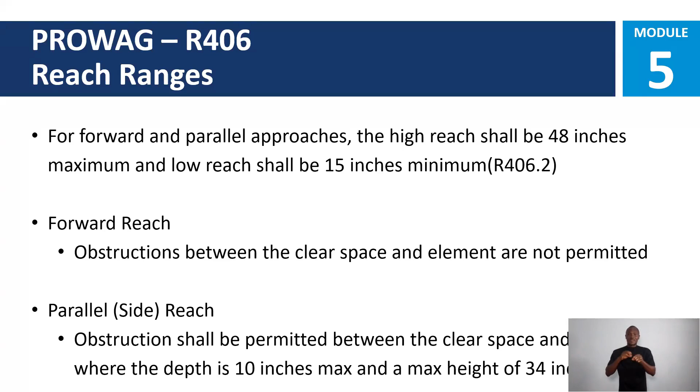And so we're going to move on finally to PROWAG supplement technical requirements. It's going to continue on with our definitions. So a couple cleanups from our last APS discussion. In that section 404 that we just talked about with clear spaces, it specifically states that clear spaces shall not be located on curb ramp runs or flares. So that is specifically mentioned under that clear space requirement, that it has to be outside of the ramp runs, it's got to be outside of the flares, because it has to be in that level landing.

I will also add that that exception is on there for matching the running slope. But if you're using part of the curb ramp landing for your clear space, you could also fall under the IDOT standards, which have the level landing up at the top. So again, this is another example in which the IDOT standards might be a little more stringent, in which, yes, you can match the running slope for the clear space per the PROWAG standards. But if that clear space is the same as your curb ramp landing, the IDOT standards are going to have a level landing at the top as of this moment, subject to change.

So I think you can start to see how this is all kind of tied together. And it's not easy, but this is certainly something that you can do. My best recommendation to you is to just go through the standards, go through the requirements, and just check the boxes as you go along.

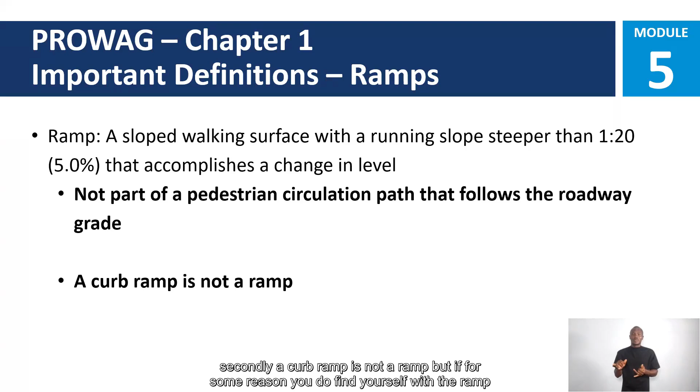But if for some reason you do find yourself with a ramp, and where I think we see this the most is ramps that come off of the public sidewalk and provide access into those buildings, running slope is going to be your 1 to 12, 8.3% maximum slope. Cross slope is going to be that 2.1%. Your clear width is 48-inch minimum. This is an exception that goes back to the 2010 ADA standards: if that is a ramp that serves a building entrance, it only has to be 36 inches wide.

And just to be clear on how we measure ramps, ramps are measured from the inside of the handrail to the inside of the handrail. So you can have 36 inches of concrete that makes a ramp. But if you have a handrail that's 4 inches inside on one side and 4 inches inside on the other side, your functional clear space is only 28 inches wide. So anytime you talk about clear width on ramps, that is measured from the inside face of the handrail to the inside face of the other handrail.

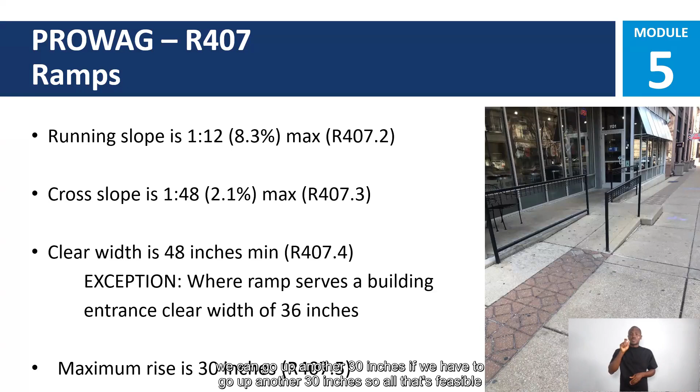Another big part of this: our maximum rise is 30 inches. So if we go up 30 inches, we have to provide a level landing. And then we can go up another 30 inches if we have to. So all that's feasible.

Ramp landings. Ramps have to have landings at the top and the bottom of the ramp. And those landings have to be 2.1% maximum in all directions. There is no roadway grade exception for ramps. So yes, your road might be falling at 5%, but if you have to put a ramp in for some reason, that landing at the bottom of the ramp and at the top of the ramp have to be that 2.1% max in all directions.

The landing clear width has to be as wide as the ramp. So if for some reason you put in a 10-foot ramp, your landing clear width is now 10 foot as well. So however wide your ramp is, that's how wide your landing is. And the landing clear length shall always be 60 inches. So if it's 4 foot, 10 foot, whatever it is, it always has to go back 60 inches. Main reason for that is that it provides that area for the wheelchair to spin around, set up, and get ready to attack that ramp.

If you ever have a ramp that changes direction, that can be 90 degrees, 180 degrees, whatever direction it changes, then it has to be a 60-inch by 60-inch landing for that ramp. So if you have a ramp that just goes up to the top and then that's where it accesses it, it can be a 3-foot wide ramp with your 60 inches back for the landing. But if once they get to the top they have to turn to go anywhere, now you get into your 60 inches by 60 inches because that wheelchair has to do that turning motion. And that 36 inches wide for the turning motion just isn't wide enough for a wheelchair.

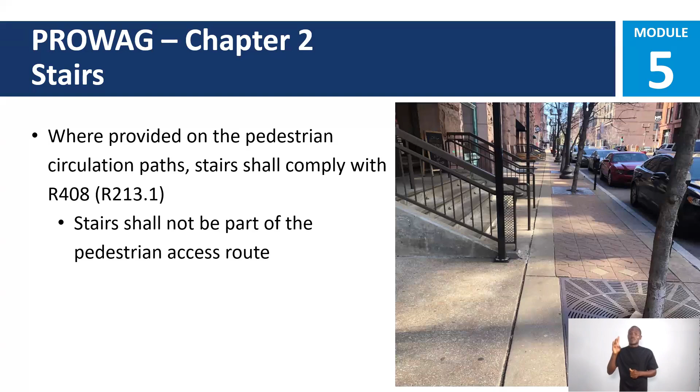If you do happen to have stairs, the key requirements to remember for stairs are: number one, all steps have to be uniform. Your max and minimum rise is between 4 and 7 inches. Treads 11 inches, so it's got to be at least an 11-inch deep stair. PROWAG doesn't want open risers. Main reason for that is so you don't get your foot stuck underneath and trip. There's a whole chart on nosings, so if you're passionate about nosings on stairs, they got a chart for you. And again, the leading edge of each step tread and top landing shall be marked with a stripe. That's one of the big changes from the new PROWAG, is they want that stripe on your stairs.

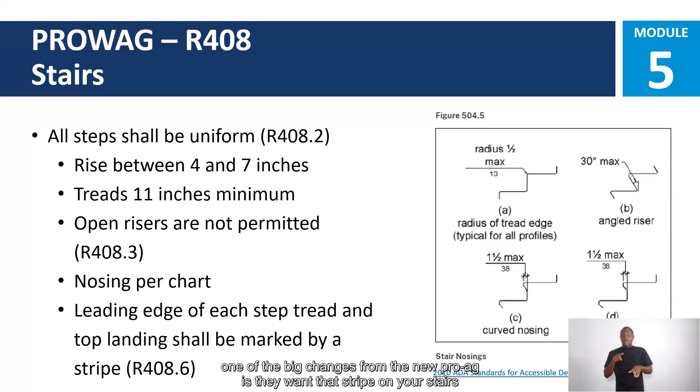Handrails. Handrails are required at both ramps and stairs. You do not need handrails at curb ramps, because as we've said 100 times today, a curb ramp is not a ramp. But if you do put in a ramp or stairs, handrails are required. They have to be on both sides. You can't just have a handrail on one side of your stair. Continuous within the full length. Height-wise, 34 to 38 inches is the magic number on that. And then also a 1.5 inch sort of gripping surface.

So every once in a while, someone will try to put in a really fancy handrail that's like 6 inches wide. It's not actually grabbable. So again, what PROWAG is all about is functionality. PROWAG is not here for beauty. PROWAG is not here for design aesthetics. It is here to allow people to get where they have the rights to go. So 1.5 inch clearance between handrail and adjacent surface. You got to be able to grab that handrail is kind of the easiest way to think about that. Bottom of the gripping surface not obstructed more than 20% of the length.

Oh, question. You can, yeah, so at that point you would mount the handrail to the wall. And the big thing there is to make sure you have that 1.5 inch surface between the outside face of the handrail and the face of the wall so that someone can truly get their hand around that handrail.

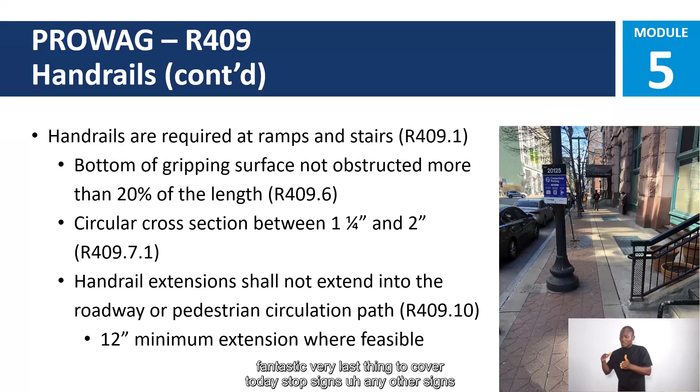Very last thing to cover today, stop signs, any other signs? Stop signs are easy, warning signs are easy. Any sign that falls under the MUTCD is easy. What I'm here to talk about today is your city signs, your wayfinding signs, anything that you might put up in your public right of way that's outside of the standard signs. And PROWAG does have specific requirements for all those signs. So if you are going to put those signs in your public right of way, R410 and R411 provide information on fonts that are allowable, heights of the words, heights of the letters, capitalized, uncapitalized, contrast.

Really the main things to remember are contrast is always important. So maintain your contrast. It can be upper or lowercase. Characters shall not be italic, oblique, script, highly decorative. Again, this is about comprehending the sign. So we want clear, straightforward messaging for these signs in a font that is very easy to read. See R410 for a detailed breakdown of characters. Again, there's allowable characters and unallowable characters. Just know that PROWAG does cover signs.

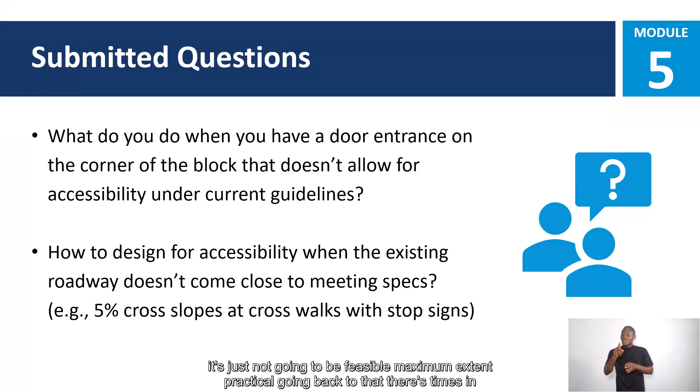Also, is there another entrance that is a possible option? And then sometimes at the end of the day, it's just not going to be feasible. Maximum extent practicable, going back to that. There's times in which it's just not going to happen. Document that you did the best you possibly could and move on.

How to design for accessibility when the existing roadway doesn't come close to meeting specs. I think we talked about this a fair amount as well. It's about the maximum extent practicable, document it, and if you're reconstructing everything, at that point, that's whenever you're making sure everything meets those requirements, once you get into that full reconstruction world. But whenever your scope is just limited to touching curb ramps, you're gonna be minimized in what you can do. But do the best that you can and set yourself up for the future would be my advice on that.

Resources, there's a ton out there. We mentioned it a couple times. Encourage you guys to check CMAP's website. This presentation and recording will be out there. All the other ones that we did are out there. Resources that were available at other presentations are out there. Really, the goal of this is to continue to have this be a resource for you guys moving forward. Federal standards, if you need them, we have links to the ADA, 2010 ADA standards, PROWAG guidelines, all that good stuff. Illinois Accessibility Code, IDOT.

If you don't already use them, Great Lakes ADA Center is a great resource. They are local, they're based out of UIC. They offer support when it comes to ADA, but they are not a reporting governmental agency. So what that means is if you call them with a challenge, they're not going to turn around and call somebody else within the government. They were actually created out of the Americans with Disabilities Act, and they exist solely as a technical assistance for you guys. That is the reason they are here, is to be your first phone call whenever you have questions.